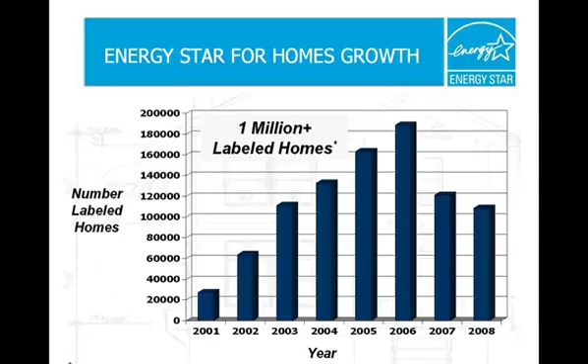Okay, so the first slide, I'm just going to start off with some review slides. Again, we're here because this program really truly has grown impressively, and I think we have a lot of folks we work with. You can see by this growth chart here that we're tracking the industry slowdown, but if you look at the total number of homes, we're at 1 million plus labeled homes today. So this program has grown, and while numbers do track down with the industry, we go to the next slide and look at the market penetration. Again, that is very strong, and the interest in the program continues to grow.

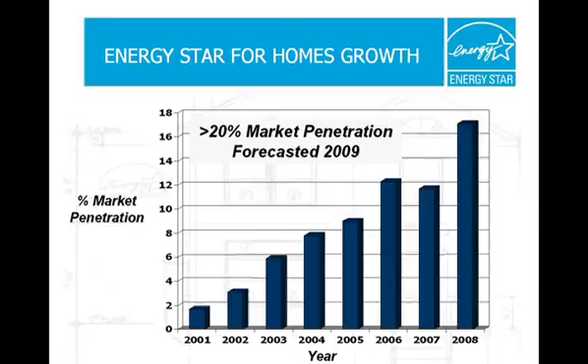Last year, 2008, we did 17% market penetration compared to 12% the year before. 2009, we're forecasting 20% or so market penetration. So again, very significant growth, and we're looking at 1 in 5 homes constructed in 2009 earning the Energy Star.

What I also like to do when I start is to talk about how Energy Star does compare with green programs, just so it gives some context. We're very much similar in that we both are voluntary with green programs, and we really focus on a label that recognizes builders for achieving excellence. What's very different about Energy Star and green programs is the approach we take to our program threshold requirements. We basically develop very rigorous specifications that are clearly defining energy efficient in a very non-negotiable way. A lot of specifications that are required, not a lot of choices. But we think in the marketplace that is really an important solution we provide, that the consistent delivery of features in Energy Star are important.

I'm sorry, I had to reduce the volume on my computer so I wasn't having an echo.

The specifications ensure a consistent delivery of a package of improvements that consumers can count on, whereas the green programs offer a lot more flexibility. The green programs are point rating systems with multiple tiers, and so you get more variation in what you get from home to home. This is a very different approach, but it explains why these specifications are so important to us. The specifications are the ultimate way to define energy efficient for the Energy Star program.

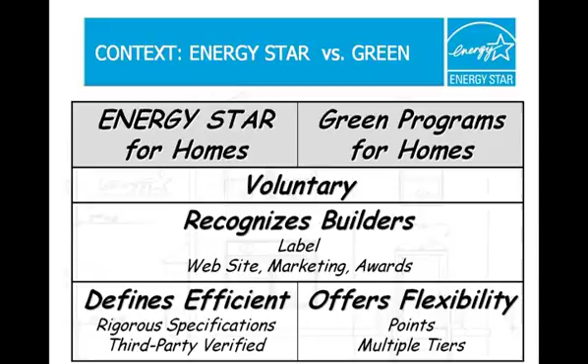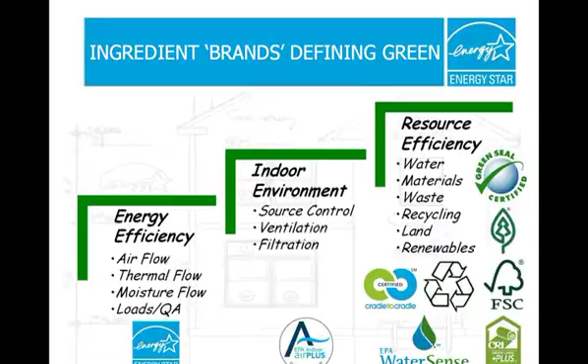And if we look at basically the construct of green programs, I always like to show it in a simplified format where you have energy efficient performance, indoor air, and resource efficiency as the cornerstones for green. And EPA labels are a great ingredient way to define internal attributes of green programs. Energy Star for efficiency, Indoor airPLUS for indoor environments, and WaterSense for the water resource portion of resource efficiency. And what's interesting is there are a lot more internal labels that resource efficiency can use to further define other attributes. So moving along, let's talk about what's the same with these new specifications.

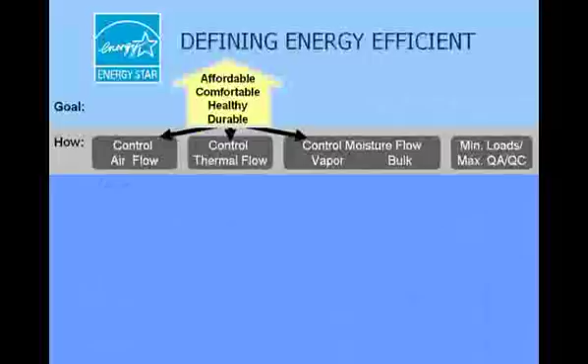And essentially, what doesn't change is the broad mission we have with Energy Star qualified homes to grow into a comprehensive building science program. And we are growing up with these new specifications in a very significant way. But the cornerstone of building science is that you can't deliver a building that works unless you do 3 things: control airflow, thermal flow, moisture flow. Moisture flow is 2 components: vapor flow and bulk moisture. And then after that, you're always looking to be more efficient with your loads, and have a QA/QC component.

Now, within that construct and that ambition of what we wanted to do with the program, the first specs came out in 1996. They introduced 4 or 5 main components: the air sealing of the house more consistently from home to home, tight ducts, low-E windows, the efficient heating and cooling equipment appropriate to climate, and the verification process, which was in a very, very nascent existence when we came along.

And then in 2006, we introduced our second generation specification change, mostly focused around this new thermal bypass checklist, and we contributed to that with the air barriers and insulation alignment. Additionally, we had right sizing as a requirement, and the prescriptive package at least started to introduce more requirements for water heating, lighting, appliances.

And that's where we are today. And again, for review, the third specification's out. And with the third specification, essentially we're adding what we think are the necessary pieces to complete the building science picture. Again, I think Energy Star grows up with this specification. It becomes what it always wanted to be as a program.

And the way we've completed the building science is by adding insulation installation and minimum thermal bridging to wrap up the thermal flow control, adding pressure balancing to enhance both airflow control and, in fact, even some moisture vapor control because of driving forces in rooms where the doors are shut.

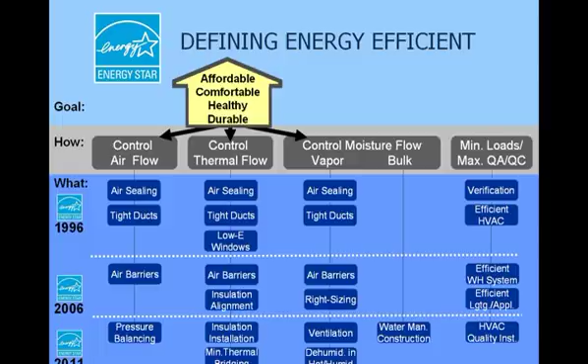And then also for vapor control, ventilation, dehumidification in hot, humid climates, bulk moisture with a comprehensive water managed construction set of requirements, and then enhancing the HVAC heating and cooling efficient equipment requirements by also making sure that the whole systems are installed properly. So this is where we were with the original proposal, and this is where we're staying.

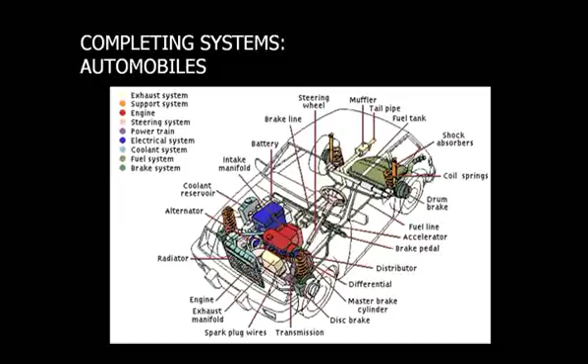Now, what I'd like to talk about with these specification changes when we grow up is that what we're starting to deliver, rather than pieces of a system, are complete systems. And much like when you buy a car, what's so important to you is that you have complete systems, electrical systems, powertrain systems, engine systems, braking systems. It's the same thing with Energy Star. I think what we're trying to do is ensure that we have complete systems.

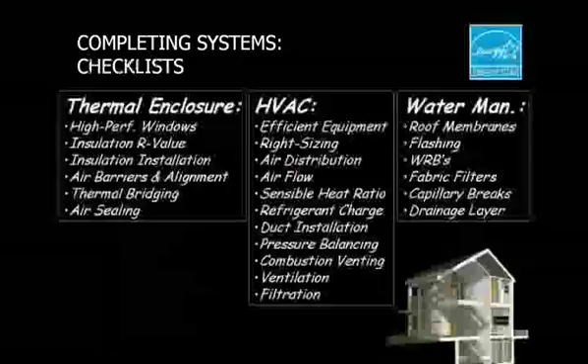And the 3 cornerstones to the systems that we're focused on are the thermal enclosure system, the HVAC system with quality installation, and the water managed construction system. And so what we're doing now is having 3 key checklists that deliver these systems with the specifications. So let's look how this works.

Again, there are mandatory measures vis-a-vis the checklists, and what's also the same is the prescriptive and performance path options. The prescriptive path option will stay the same, where the reference design, which is essentially the current builder option package approach to providing a set of requirements prescriptively for Energy Star, will be available, and they will be ramped up as per the original proposal.

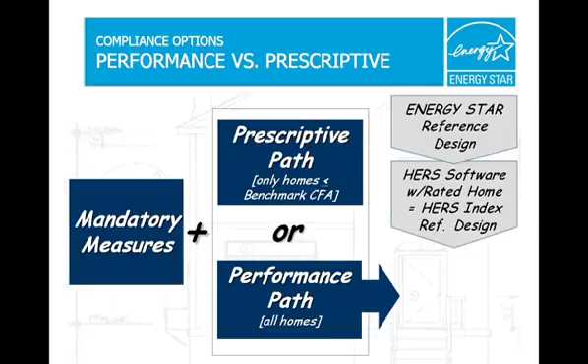And then for performance path, again, going through this in a quick review, you take the reference design, you apply that to the house that you're rating in terms of floor area, volumes, orientation, and location. And you apply all the other reference design specifications for insulation R value, for window solar heat gain coefficient and U value, for air infiltration, duct leakage, and so forth.

You apply those reference design specifications to your house plan, volumes, location, orientation, and that yields a HERS index reference design score. Now, if your home is the same or smaller than the average size home that we call a benchmark home, you're done with your threshold. But if the home's bigger, then you have to do a size adjustment to get your final Energy Star HERS index target score.

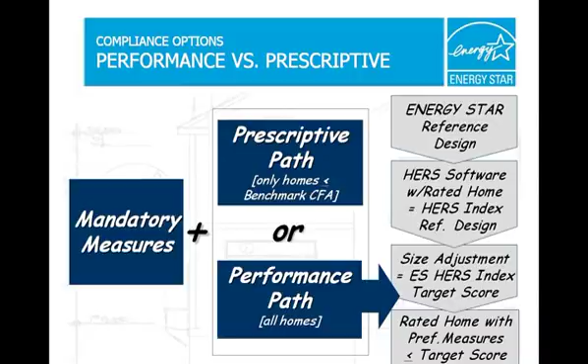And again, if your house is the same or smaller than the benchmark, simply rating the house with the reference design yields that target score. If it's bigger, there's a size adjustment that hasn't changed from the prior proposal. Thereafter, on performance, any other preferred rated measures you can apply to a second software run, and you just have to make sure that the result is the same or better HERS score than that Energy Star HERS index target score.

Now, since this is a little complicated, we've provided on the website a new Energy Star 2011 HERS index target procedure, and that document will be posted tomorrow along with the other documents, and it's an attempt by us to make this a lot clearer. In addition, what it does, it shows the specific inputs that would be used,

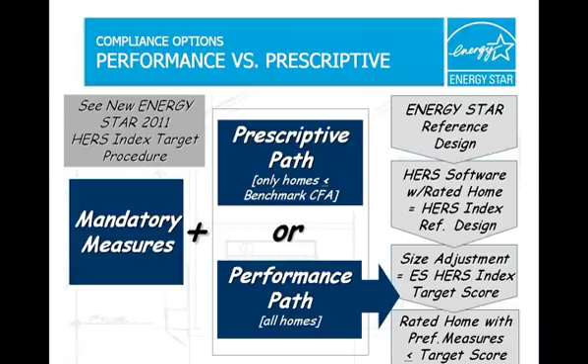climate zone by climate zone, rather than have them kind of clumped together as they are in the National Reference Design Specification. So instead of saying IECC 2009 insulation, it would have the specific insulation values, climate zone by climate zone. And instead of an Energy Star window, it would have the actual solar heat gain coefficient and U value for windows, climate zone by climate zone. So that HERS index target procedure has extra guidance on how this would work, along with tables specifying input values in a lot more specificity.

Okay, so that's what stayed the same. We're basically the same prescriptive performance format. We're off the fixed HERS score with the simulated performance method, and we're still focusing on systems. So what's different? And here again, I'm going to ask you for your forgiveness once I get past showing some graphic slides of the systems. We go through a lot of word slides.

Okay, so first, like I said, there are three checklists. The first is the thermal enclosure checklist, and that addresses high performance windows, insulation R value, insulation installation, air barriers and alignment, thermal bridging, and air sealing.

What's different is this used to be called the thermal bypass checklist and the quality framing checklist, and these have been combined into one new checklist called the thermal enclosure system checklist. Also, quality framing is now called thermal bridging, because this really addresses a number of options to minimize thermal bridging through the framing, such as advanced framing or rigid insulated sheathing.

We've added sections for high performance windows and insulation installation that require minimum IECC windows and minimum IECC 2009 R-values. So when you do performance path compliance, you can trade off insulation and windows, but not below these levels, since they're now specified on the checklist as a minimum requirement. We don't want any Energy Star qualified home to have less than the IECC 2009 window and insulation requirements. That's a new change, with new sections to make sure those are checked off.

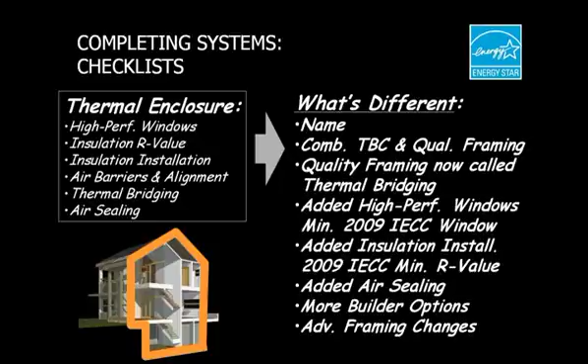That's an important point, and I'll mention it also includes specialized items to be checked. For modular homes, you have to make sure there's a gasket and foam seal at the marriage joints. For SIPs, you have to make sure the panels at all joint connections are caulked and taped, and there are a whole host of traditional construction requirements as well. There are more builder options for them to check themselves, because we don't want to increase the number of field visits, and there are changes to the advanced framing system I'll go through in a slide just ahead.

Now on the next checklist, HVAC quality installation is now called the HVAC system quality installation checklist, and it addresses a full complement of efficient equipment requirements: right sizing, air distribution, airflow, sensible heat ratio, refrigerant charge, duct installation, pressure balancing, combustion venting, ventilation, filtration, similar to what we had. What's different is the checklist is now fully aligned with ANSI and ACCA protocols.

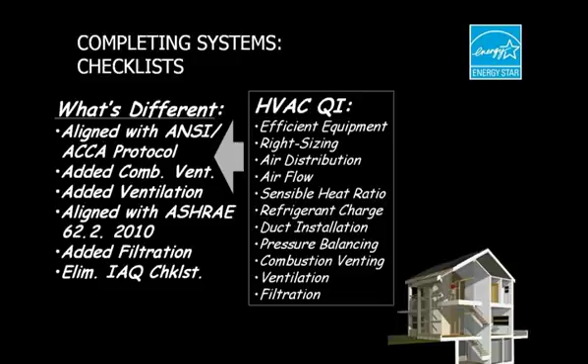We've added combustion venting requirements that ensure you have direct and power vented equipment in these homes, because again they're so tight and well insulated. We've added ventilation to this section because it belongs here, and we've aligned the ventilation with ASHRAE 62.2. We added filtration because it's part of a complete HVAC system. And we completely eliminated the indoor air quality checklist, which will help avoid confusion with the Indoor Air Plus label, also put out by EPA.

The last checklist is now the water managed system checklist, with two components: a builder checklist and a rater checklist. The name changed to water managed system checklist, and the split into rater and builder addresses comments where raters were concerned about access to check certain items requiring additional trips, and about having to get into positions that might be dangerous or create liability for them on the job site. So we pulled items into two separate checklists, removed the requirement for insulating pipe and exterior walls, and added a disclaimer that moisture-related problems aren't guaranteed to be mitigated just because of this checklist. So that's the third checklist.

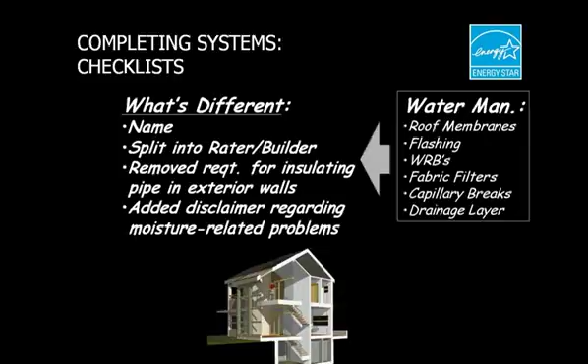From here on, we're going to go into some significant word slides. Again, this is for the hardcore Energy Star qualified home stakeholder who's really tracking what we're doing, really working with us as a business. I'll go through these fairly quickly so I can allow time for questions and meet my travel schedule.

So the first is advanced framing requirements. I think this may have had the most significant number of comments of anything on the first round of the vetting process with that first proposed specification. Here's some of the highlights of what we've done to address comments coming in.

First, raters do not direct builders to remove framing. We provide clarifications that their job is just to make sure that the information on the framing plans is consistent with what's going on in the field, and the framing plans are required, again, to use less framing.

In addition, all platforms in the attic must be raised, not just the ones for the HVAC equipment, and they have to be raised to allow full depth insulation, so that's been clarified.

Also, we made an accommodation with raised-heel trusses where we said that the insulation depth at the edge only needs to be to 75% depth of the full insulated thickness in the attic. This was done just to accommodate some constraints with raised-heel trusses, so this was changed as well.

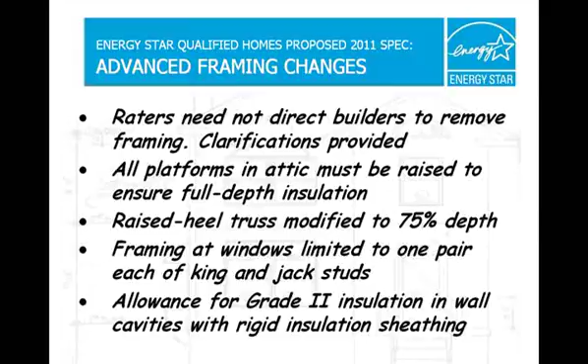Where you use rigid insulated sheathing as your option for addressing thermal bridging, in the wall cavity you can use grade 2 insulation, and that's the only exemption from grade 1 insulation with the Energy Star specifications. Where you have rigid insulated sheathing on the outside, in the wall cavity, grade 2 insulation would be allowed. Again, this is the only exemption.

Sticking with the framing checklist, moving to the HVAC contractor checklist. Also a lot of comments on this one as well. What we're addressing here, well, the first thing here is we want to make sure there's a disclaimer that...

We're not ensuring good indoor air quality just because there are ventilation requirements and we're addressing some moisture issues. So there is a disclaimer on this checklist saying that these are intended to help improve the HVAC system, and they're not guaranteeing an improved indoor air quality house. That's just a disclaimer that's on the checklist.

Now also, rather than requiring a fixed sensible heat ratio of 0.7, what we've done instead is we require on the HVAC contractor checklist for the contractor or the engineer or designer sizing the system to compare the latent capacity of the equipment that's specified to the latent load.

If the latent load's not met, then you have to install an Energy Star qualified dehumidifier. So rather than just have an arbitrary number like 0.7 SHR, there's this series of lines on the checklist where you list the latent capacity of the equipment, you list the latent load. If the load's greater than the equipment, then you know you have to have the dehumidification. So that was a change made there.

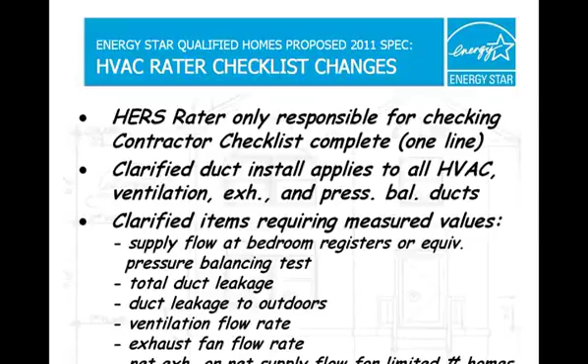We continue with total duct leakage, duct leakage to outdoors, and ventilation flow rate. That has to be measured, making sure it's no more than 10% above ASHRAE 62.2. Check the exhaust fan flow rate, also consistent with ASHRAE 62.2, and where there is combustion equipment that uses indoor air for combustion, you may need to do a net exhaust or net supply flow. This only applies to a limited number of homes, such as a fireplace or wood stove using internal air for combustion. If fireplaces or wood stoves are ducted with outdoor air for combustion, you don't need to do this. It should be a very limited number of homes needing this measurement.

Moving along to the next items for the HERS rater checklist: we had 3 requirements. One, building cavities cannot be used for supply or return ducts; ducts shall not be installed in exterior walls; and exhaust fans and duct boots shall be sealed. We clarified requirements for no duct bends over 90 degrees with language that is more enforceable in the field, and we clarified the same for no loop duct work, where a contractor would take a full oversized length of duct and use it for a much shorter run with looping.

We clarified what's required there. Also, for ventilation inlets, in climate zones 1 through 3 you need 2-foot clearance above grade, and in zones 4 and higher you need 4-foot clearance above grade. Lastly, we relocated the requirement for Energy Star exhaust fans with ventilation and clarified the fan rating requirements onto the rater checklist as well.

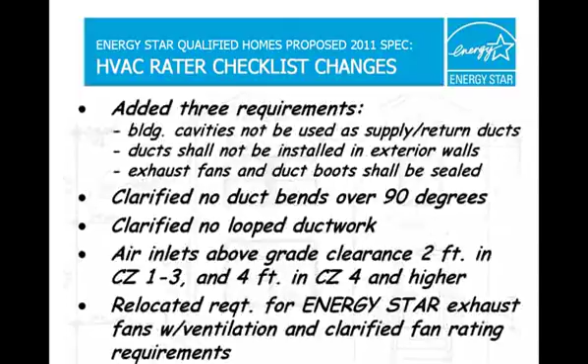So I think we're good there. Moving to the next set of updates for the mandatory requirement changes: we eliminated low flow shower heads and efficient hot water distribution. We eliminated Energy Star qualified lighting, appliances, and fans, although they still are in the reference design, meaning if you're doing Energy Star on a prescriptive path using the reference design, you would need Energy Star qualified lighting, appliances, and fans. But if you're doing performance, you could trade off against those, and they're not on the mandatory checklist. We eliminated R8 duct insulation mandatory.

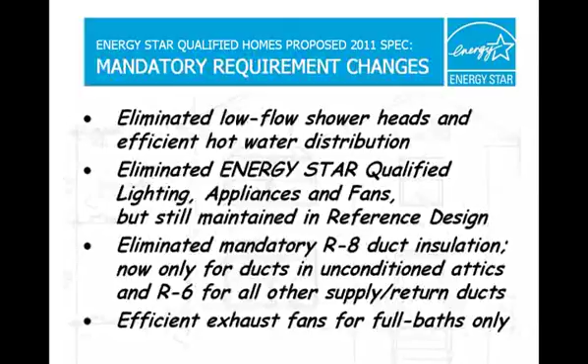Now R8 is only required for ducts inside unconditioned attics. R6 is acceptable for all other supply and return ducts. And efficient exhaust fans are only required for full baths.

On the reference design, we went through a number of changes. The gas furnace AFUE has been dropped from 92% to 90% to align with the Energy Star threshold. There are increases in heat pump efficiency in cold climates to address challenges with keeping consumption levels down during very cold times of year. So in climate zone 4, the heat pump requirements went up to basic Energy Star levels: 8.5 HSPF, 14.5 SEER, 12 EER with electric backup, or instead of electric backup, you can use an Energy Star qualified heating system as a dual fuel system. That's climate zone 4.

Reference design modifications continued. Again, we talked about this before. We go to R8 duct insulation for ducts in unconditioned attics, R6 at all other supply and return ducts. And one other note is that 80% efficient bulbs or fixtures are specified for the reference design, but on prescriptive compliance you could use the advanced lighting package just to help promote that sub-label for Energy Star. And the advanced lighting package is 60% of fixtures, 100% of fans. So you have that option as well.

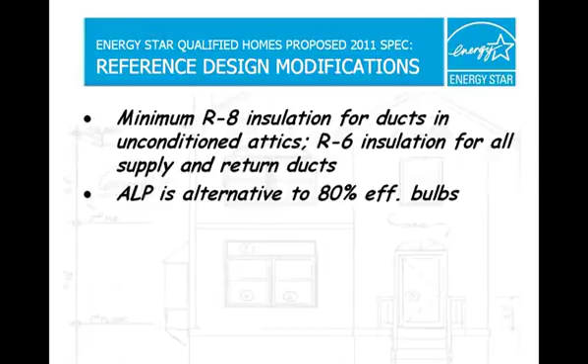Now, those are the key technical changes and the responses and what you will see in the new information. What I want to do right now is go through the implementation schedule that we currently are planning. And some details are cut out just to kind of go at the most critical items.

But here we go. Starting January 1st next year to January 1st of 2011, that will be a critical time for the EPA team and the contractor team working with us. We have an amazing amount of work to do next year. We have to develop 3 field guides, one for each of the checklists: thermal enclosure, HVAC quality systems, and water management. So we have 3 field guides to develop. We are going to be developing an extensive training curriculum around those guides, train-the-trainer classes to enlist an army of folks who can help us provide training across the country.

And then hopefully we will leverage a lot of support from industry and our utility sponsors to do regional training classes all across the country. At the same time, we'll be developing web-based training 24/7. We're talking with some partners about video-based training 24/7 as well. Some coordination with ResNet has to start to try and see if we can team up with them to get our checklists into their rating standards so that ResNet oversight will extend to those checklists, and then work with the sponsor programs, states, and utilities to augment their support where needed and not already there with QA/QC programs.

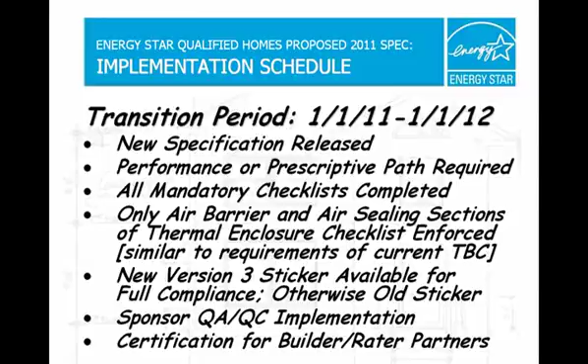But in a lot of our travels, our team has found it's interesting how many times you experience situations where builders or raters haven't really understood or gotten familiar with all the requirements of the program. So there's too much new rigorous requirements not to make sure we know every partner has gone through a minimum background education about the new program.

And then in 2012, starting January 1st, all requirements for the checklist, all requirements for performance prescriptive combined are in play and have to be followed. We expect to have all the sponsored QA/QC programs in gear. Hopefully we have that time.

We will see some success getting RESNET to adopt the new checklists. We're getting close to that. We are understanding that RESNET's also augmenting their QA/QC program, and EPA will also provide a QA/QC program, particularly to fill in gaps where there are no sponsor programs around the country. So a lot to do.

And lastly, some new policies I want to bring out. We will not allow raters to alter the configuration of the Energy Star reference design unless directed to do so by EPA. So what EPA will do is provide customized reference designs for all states with rigorous codes.

So this will be our responsibility to get those out there. We don't expect raters to do this on their own. They have to get the direction from EPA, and we'll provide those customized reference designs for those states. And we do have a number of states we have to get very active working with: Oregon, California, Florida, and some others, because the codes are ramping up in those states or already increased right now.

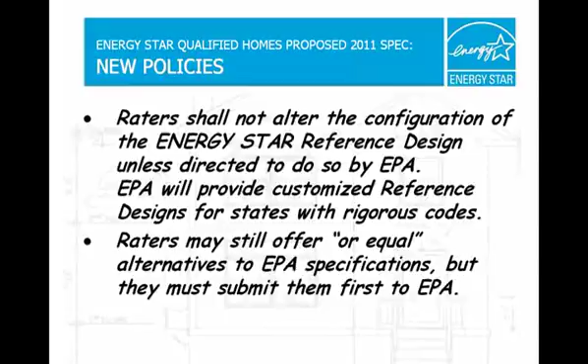It's a little bit of a compressed time. December 16th is the deadline to submit comments to EPA. We expect first quarter of 2011, hopefully in January, but maybe because of comments that come in, we want to build a buffer in case we need extra time. We will have the new 2011 spec on the street, and we have our work cut out for us.

2011, 2012, lots of very important work to do. And I can't tell you how much we appreciate the support from all of you. We think Energy Star for Homes has finally grown up to the program it should be.

We had to get there incrementally. We'd love to have been a complete building science program from the beginning, but you have to kind of address real world constraints, and now's the time to bring this excellence to the market, bring the high performance homes and systems to the market. And we think the builders that work with this program are going to have an incredible competitive advantage working together to get a message out to the home buying public about how good these homes will be. So that's my introduction.